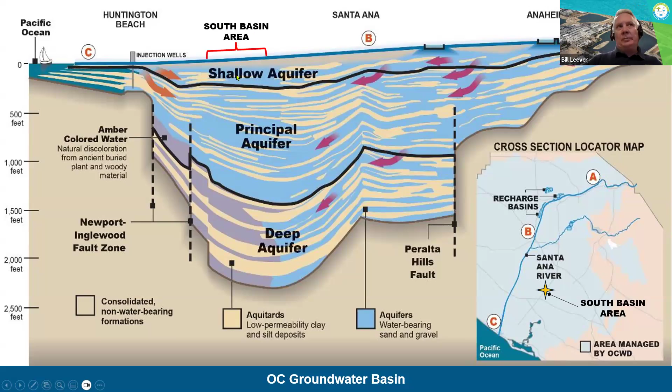Also wanted to point out here along this cross-section location is the South Basin area occurs in the pressure area, the confined area, roughly shown by this bar right here. Okay, focusing in a little more on the South Basin area.

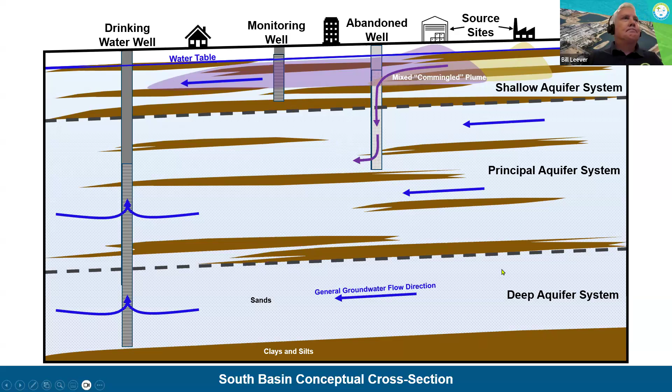IRWD3, back in 1998, started getting concentrations of VOCs showing in some of our test water samples. And IRWD3 is only perforated in the principal and deeper aquifer. So at that point, we knew there was an issue, and we began investigative work.

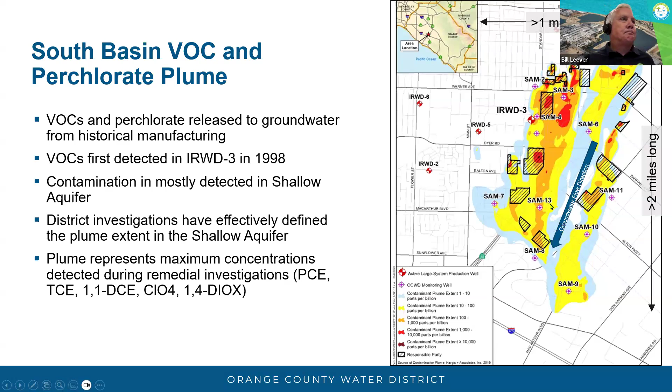So the district is conducting this work under the authorities provided to us under the OCWD Act. And although it's not a Superfund site, we're conducting the work in accordance with the National Contingency Plan and in coordination with the Regional Board and the DTSC.

So a quick chronology of the activities in the South Basin. So as I mentioned before, in 1998, VOCs were detected in IRWD well 3. In 2006, OCWD began active investigations in identifying the source sites, conducting field investigations. In 2015, we issued a preliminary remedial investigation report.

In that report, a number of data gaps were identified. Further investigation occurred through 2018. And then the district, through its consultant, compiled all of the data gathered to date, issued a supplemental remedial investigation report in 2020, and then began our feasibility study of potential remedial alternatives. That was finalized in January of 2023.

And since that time, the district has initiated the preparation of our interim remedial action plan, or in NCP parlance, our proposed plan to remedy the groundwater contamination in OU2, and I'll touch on that in a minute. And then we also concurrently initiated our CEQA analysis of the proposed plan. And then in 2025 on, we'll begin our preliminary design investigations, remedy design, and then construction.

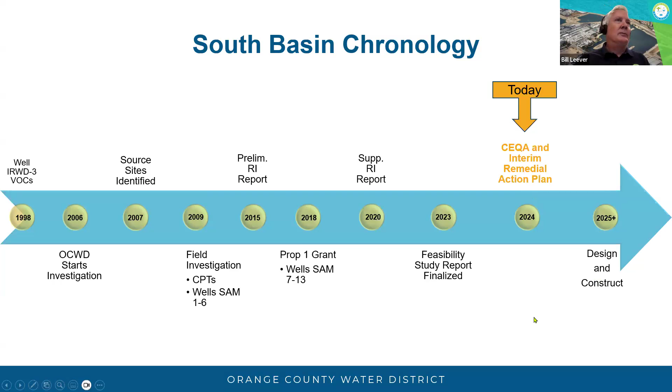So just to touch quickly on the district's efforts in recovering costs for our remedial investigations and work that will be ongoing over the next several decades. We filed suit against over 20 responsible parties in 2008. We've settled with 17 of those parties, and we still have ongoing litigation with 5 other parties.

So what is a feasibility study? A feasibility study establishes our remedial action objectives. What is it we plan to achieve by implementing a remedy? We evaluate various remedial technologies. We refine that list into a smaller list of remedial alternatives, and then we evaluate all of those alternatives against the criteria established in the National Contingency Plan.

So the alternatives that we developed were a no action alternative, which is a requirement of NCP, and it simply is a baseline upon which the cost and effectiveness of the other alternatives are evaluated.

We evaluated monitored natural attenuation, groundwater extraction and treatment with disposal to the sewer and GWRS, groundwater extraction and treatment with re-injection of that water back into the shallow aquifer system. We evaluated in situ chemical oxidation.

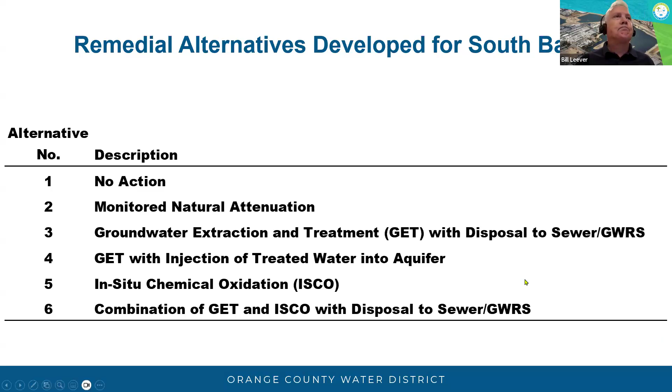That water will then be discharged to the sewer, where it will flow to GWRS and be treated at GWRS, and then ultimately be recharged back into the basin up in those recharge basins up in Anaheim.

Alternative 4 is a similar process in extracting groundwater, but then that groundwater is treated through GAC and reverse osmosis and is re-injected back into the shallow aquifer system nearby each site.

To touch base on the water we are treating, our efforts are focused on what we're calling operable unit 2. Operable unit 2 is the groundwater that is off-site of the source site. So each of the source sites has or is planning to conduct remedial investigations and implement remedies. And Mona and Angela will be talking about those.

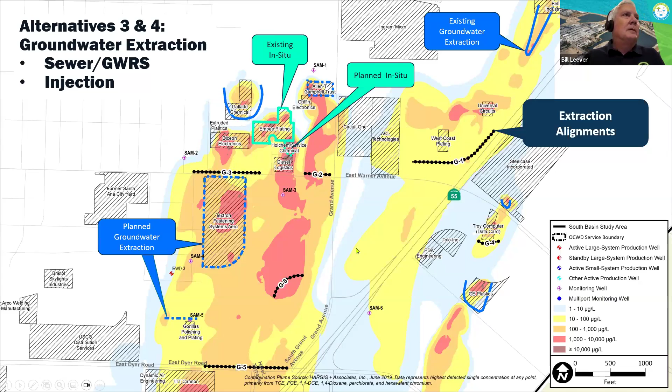And then here in the southern portion of the plume, alternatives 3 and 4, you'll see 2 alignments. And these 2 alignments simply act as catcher's mitts or backstops to, again, prevent the plume from moving any further south of where it currently exists.

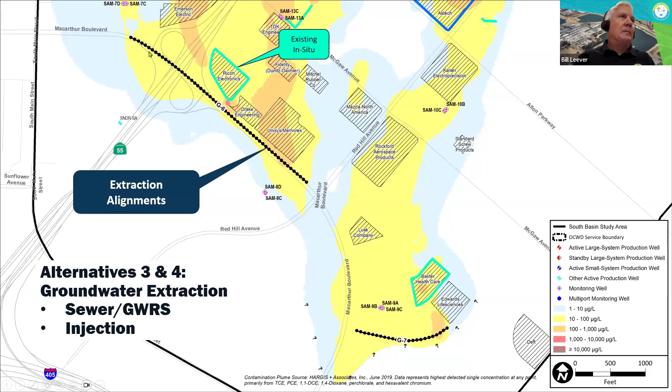So touching base real quickly on the NCP criteria used to evaluate each of these alternatives. The first 2 criteria are called threshold criteria. These criteria are kind of a pass-fail. They either meet the threshold criteria or they don't. If they do not meet the threshold criteria, they're no longer considered a viable alternative for a remedy.

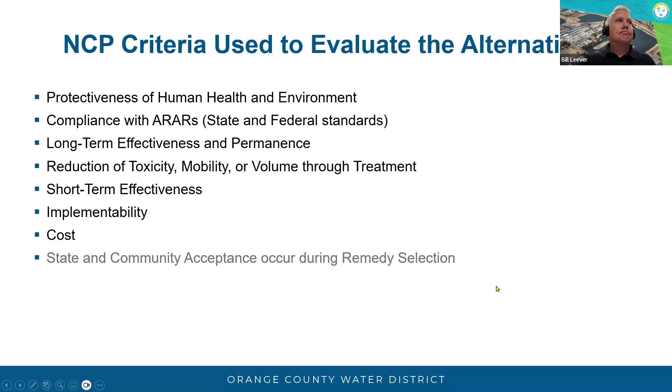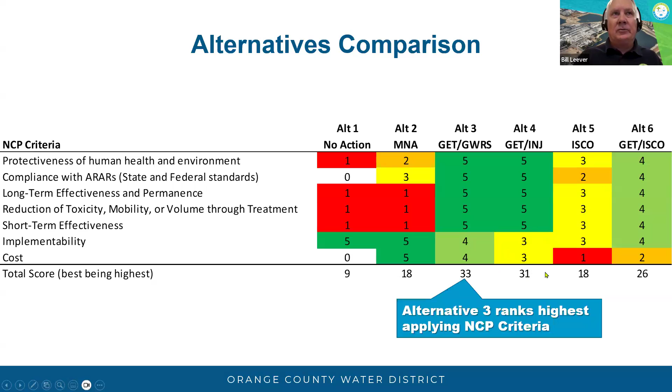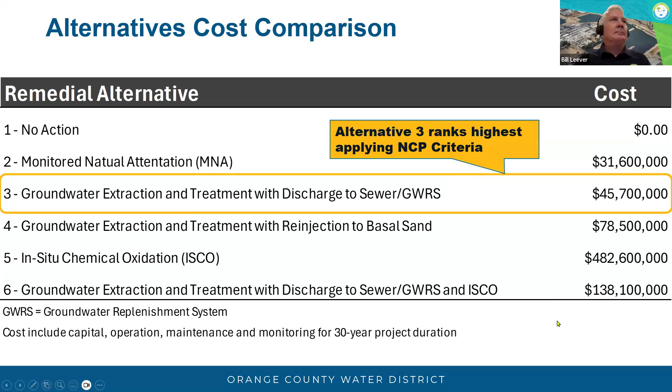So as I mentioned before, our current activities are the preparation of our proposed plan, which would identify the preferred alternative. We're also completing our CEQA analysis by preparing a draft programmatic EIR. Those will be circulated for public review concurrently in the fall of 2024.

Once we have received and addressed all of the public comments after the 45-day public review period, we will address those comments and then present the comments and responses to our board as the lead agency for consideration of approval of the draft programmatic EIR and the draft proposed plan.

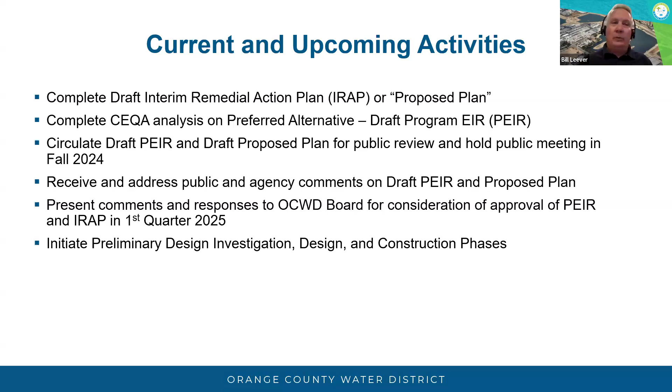At that point, if the board decides to move forward with this project and approves both the proposed plan and the PEIR, we would initiate our preliminary design investigation, which would then also require probably additional environmental analysis, which would be amended to the PEIR, and then we could move into design and construction phases.

And with that, I am going to pass it to Angela Turner for her to present on some of the DTSC's activities in the South Basin. And thank you.

Thanks very much, Bill. I will, oh gosh, I'm not pointed very well there. Okay, thank you for coming and spending a bit of your afternoon with us. Let me get my screen shared. I wanted to share with you a cleanup plan that we have at one of the sites that, okay, I think that is sharing. Can you see my slides?

Yep. Okay, great. Wanted to share a cleanup plan at one of the sites that Bill showed on his map, Embee Plating. We currently have out for public comment an interim measure work plan for in situ thermal remediation. The public comment period started on May 3rd and it'll go until June 3rd. And that cleanup plan is available in its entirety on our EnviroStor website.

So this is where the site is located. Embee Plating is right here. This is a kind of zoom in on the map that Bill shared. The area is north of Warner and west of Grand. Here's the 55 freeway down here. DTSC manages several of these sites. I personally am the project manager for Embee as well as Gallade, former Diceon Electronics, and Textron, also known as Cherry Aerospace.

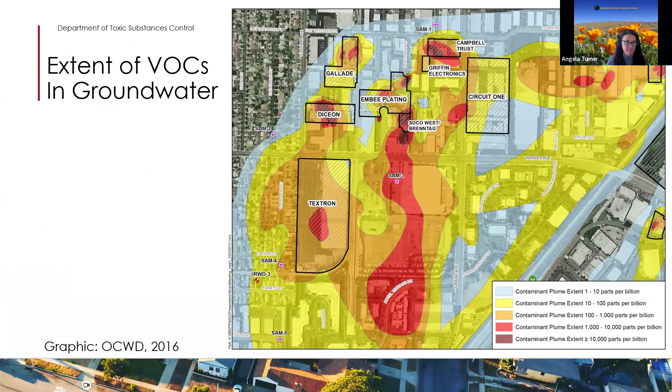So Embee Processing is a metals plating facility, and they mostly work on aerospace projects. They operate 11 buildings here at the site, but most of the releases come from the center of the site. This building and this building are the primary, with minor impacts from this one and this one. So here in the core of their property. And they're surrounded on all sides by other industrial neighbors. They're permitted and inspected by Orange County Healthcare Agency under permit by rule.

Their past uses of PCE and TCE were related to cleaning of the metal pieces before they were coated, either plated or painted. So they have constituents of concern that include PCE, TCE, 1,4-dioxane, hexavalent chromium, and PFAS. The primary risk drivers are the PCE and TCE. So we've been in a corrective action consent agreement with the facility since 2001. And in the intervening years, we've done plenty of investigation as well as installed a couple of existing interim measures.

There is a floor seal in this building over here to mitigate vapor intrusion. And there's also a system of carbon filtration for indoor air and indoor air sampling to verify protectiveness. And then this in situ biodegradation of groundwater is the existing in situ measure that Bill referenced on his slide. It's an injection of emulsified vegetable oil along with nutrients and microbes. And the proposed interim measure is the electrical resistive heating that's out for public comment currently.

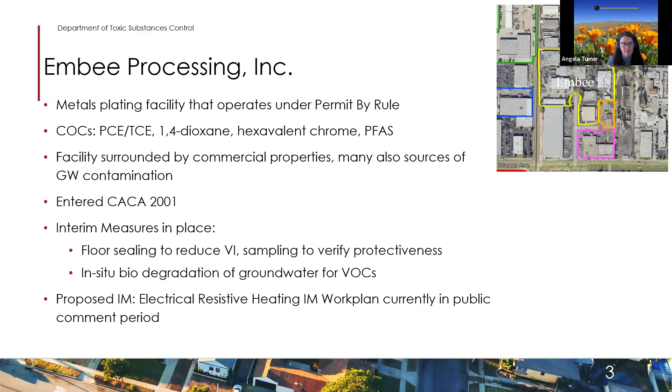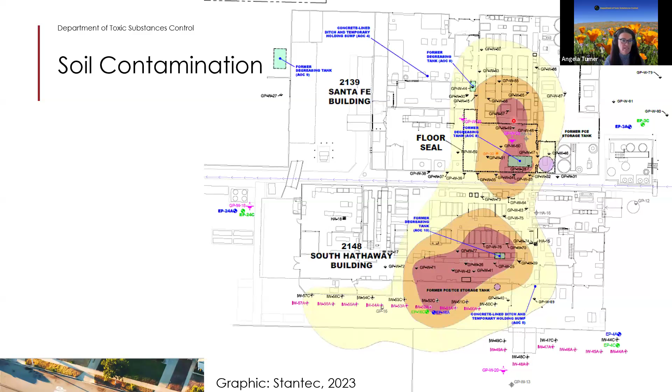So a bit about how in situ thermal remediation works. There will be power that gets brought in from the regular utility that's going to need to get upgraded by SoCal Edison because this equipment is really power hungry. That'll go to the equipment enclosure and then run out to the wells where these electrodes are installed into the soil in casings that also contain a vapor recovery component.

So they will introduce electricity into the subsurface. And because the soil and water are such poor conductors of electricity, they will heat up. This red area represents the treatment zone that will experience those elevated temperatures. The groundwater will get heated to a level above the boiling point of the VOCs, and they will partition out of solution as steam and get recovered as this green cloudy representation, recovered by the vapor recovery system.

And so that will go in these green lines over to a treatment center system. It'll get cooled and the condensate will go through GAC to the sewer. And then the dried air will go through carbon as well to the atmosphere. Those activities will get permitted by OC Sanitation and South Coast Air Quality Management District, respectively.

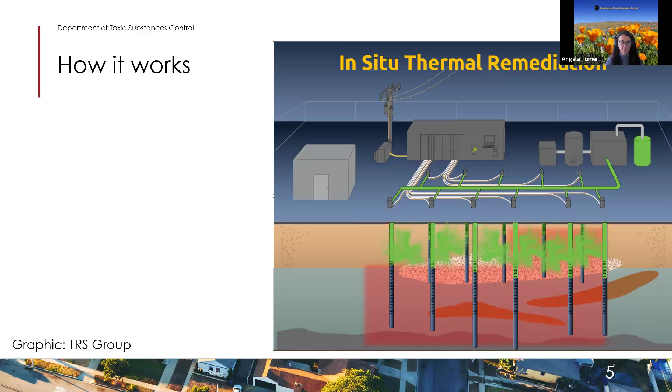So this is the plan for how these components are going to be laid out at the MB site. The red circles are where electrodes will be installed vertically, and the lines represent an overhead view of borings that'll be installed at an angle, because a lot of the mass exists under these buildings that have very large bolted down equipment, integrated with the building process lines. And this is still an operating facility, so getting in there with all of this equipment just wasn't possible.

The blue circles are locations where workers will be able to go in and install probes with hand auger equipment. The green are temperature and pressure measurement locations. There will be 67 electrode wells spaced about 14 to 16 feet apart.

So they're installed, these ones will be installed in a row. The drill rig will line up with the front bumper pointed to the south, the mast to the north, and it'll be angled from 6 degrees to 29 degrees off of vertical to install these wells. And then there's going to be a treatment compound over here in the bottom left.

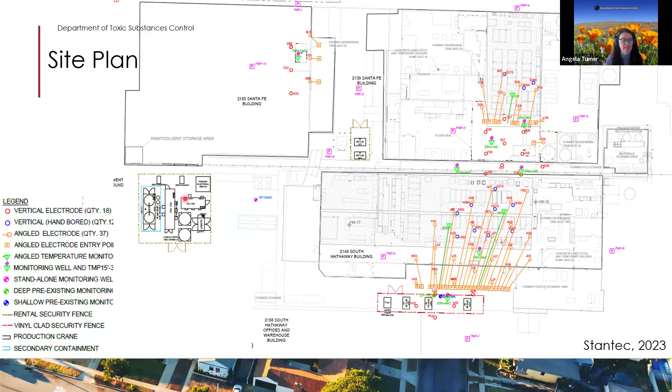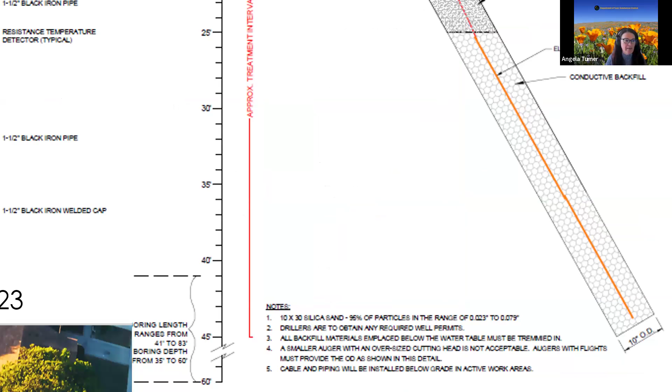So this is how the electrodes and the monitoring points are built. I think this might be a bit hard to see, so I'm going to zoom in. I'll start from the bottom up. There is a lower electrode that's installed in conductive backfill that's carbon-based, and the total depth is between 35 and 60 feet for these. So that will treat the deeper zone.

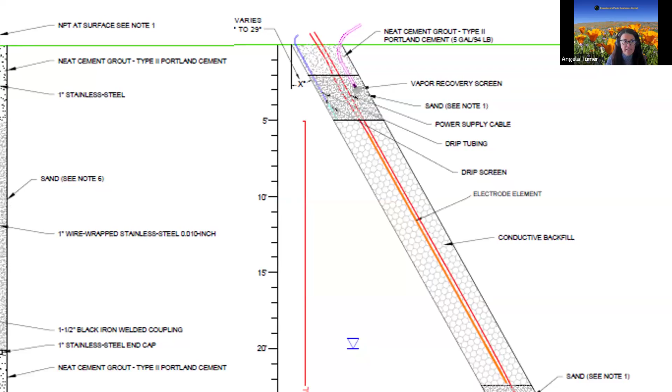And then there's a sand isolator. Here's the water table at 20 feet, then a shallower electrode. So the vadose zone as well as the saturated zone will get treated. And then up here is the vapor recovery screen. There's also a drip tube to introduce fresh water into the well, because as the vapor gets extracted that can be drying, and the electricity will spread out better if the soil retains its moisture. So the water will get fed in there on an as-needed basis.

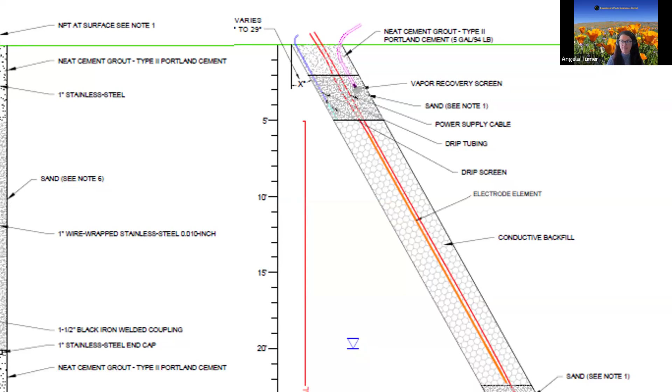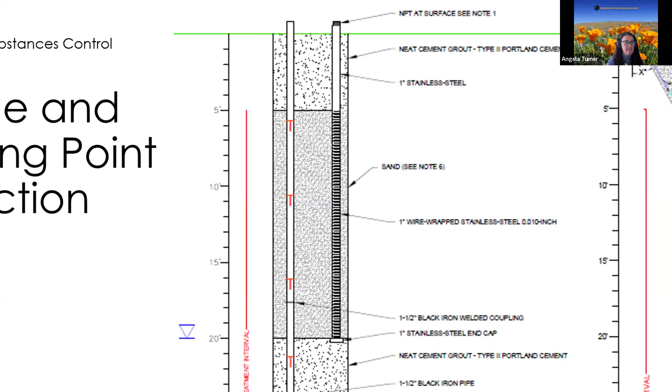So over here we have a temperature and pressure location, a casing that will just have temperature and pressure sensors. And then, let me zoom out a little so you can see that, this is a soil vapor monitoring location where we'll be able to sample to both monitor for the success of the cleanup as well as protectiveness of the occupants, because folks will still be in the buildings above. We want to make sure that the existing vapor intrusion risk that we've assessed doesn't become elevated as a result of our activities.

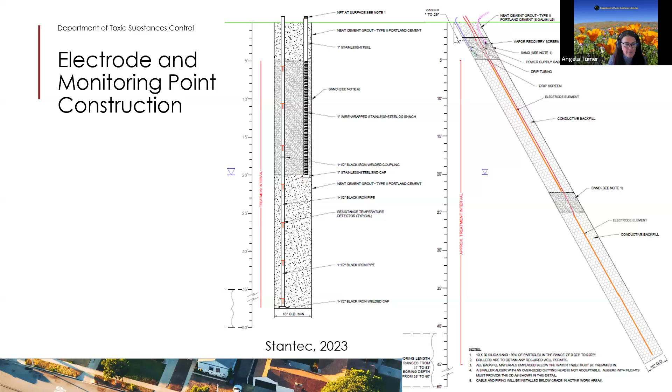So this is a, let's see, how do I make this video go? Maybe if I turn off the pointer and go back to the cursor. I didn't practice this one in presenter mode, I'm sorry.

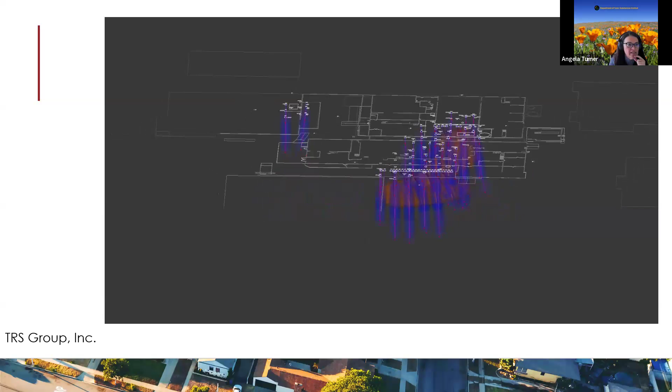Oh, there we go. So this is a 3D mock-up of the plume mass, and the blue lines are the thermal treatment wells that will intersect it. The idea was to, based on various depths and angles, get coverage of the entire area that needs to get treated and get the heat distributed through those areas, even underneath the building. Maybe I'll let that go through one more time just because it's kind of cool.

Okay, enough of that. So we'll do a lot of sampling before, during, and after the project to guide operational decisions and evaluate how effective the cleanup has been, and as I mentioned, to ensure protectiveness of human health. We'll be sampling indoor air quarterly to make sure that it's within commercial screening levels. We also have a perimeter of soil vapor wells to sample every month to monitor for any kind of lateral spread to buildings that are not currently at VI risk, to make sure they stay that way.

Subsurface temperatures will be measured daily, and pressures will be measured weekly. We're going to want to really keep close tabs on the pressures there and make sure that they are negative below the pressure of the air inside the building, so that we have transport headed from the occupant spaces into the subsurface as opposed to the other way around, so we don't induce any more vapor intrusion risk.

The waste treatment streams will include the air treatment system and the water treatment system. Those are both sampled according to the permit conditions from SCAQMD and OC Sanitation. The inlet concentrations will be measured closely because that will give us the tools, when compared with flow rates, to evaluate the total mass that we've recovered.

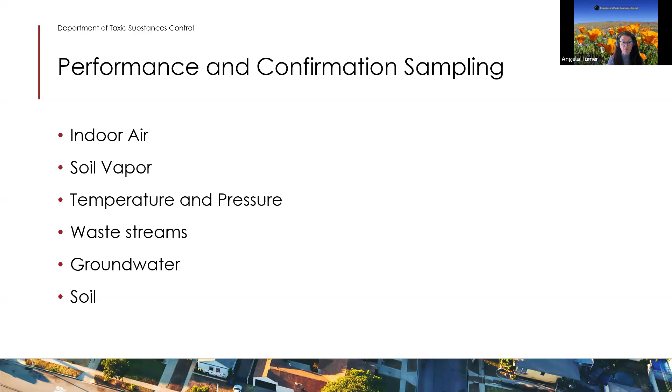We anticipate the system will run for about 6 to 8 months, and we're looking for an order of magnitude reduction in VOCs in both soil and groundwater, which is really exciting.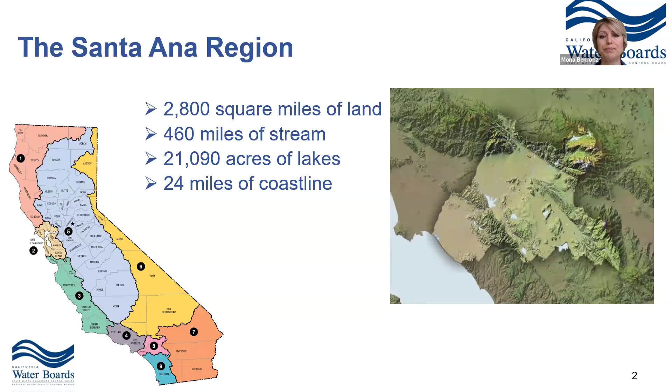To provide an overview of historical operation at this particular site, it was historically used to clean and recycle PTFE, polytetrafluoroethylene, using acid treatment. The reactor involved in this operation contained 70% perchloric acid with 30% nitric acid at elevated temperature, 300 degrees C, so you can imagine how oxidizing this solution can be. The PTFE pellets, after the cleaning and treatment using the acid bath, were neutralized and washed and placed in bins across the site for draining and drying.

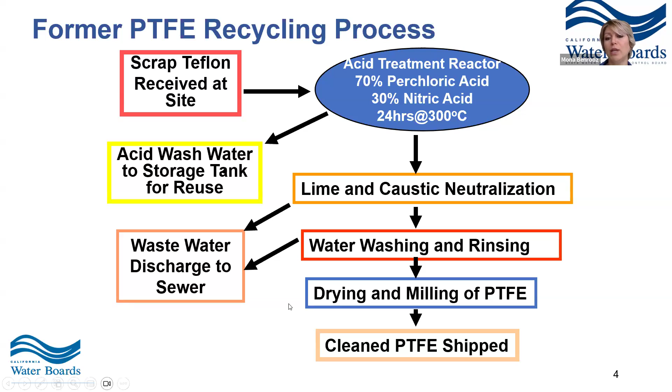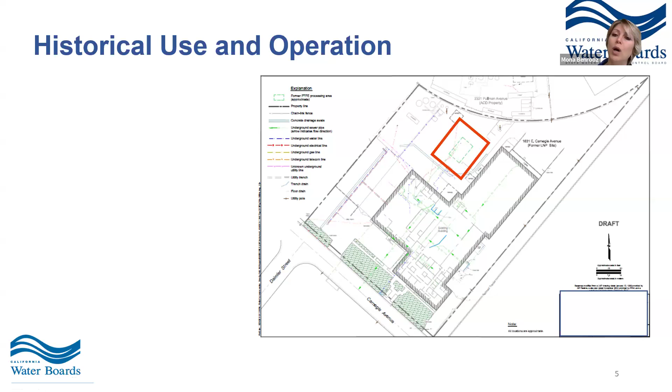Before we get to the result of the investigation and the effect of this corrosive and very reactive water on the subsurface, let me just provide you with a little overview of the hydrogeologic setting in the general vicinity of the site. So, two water-bearing zones; these are the shallow water-bearing zones that were represented in the cross-section shown in Bill's presentation. The first water-bearing zone is a dominantly fine-grained formation, dominantly clay, to a depth of about 34 feet below ground surface, depending on the location.

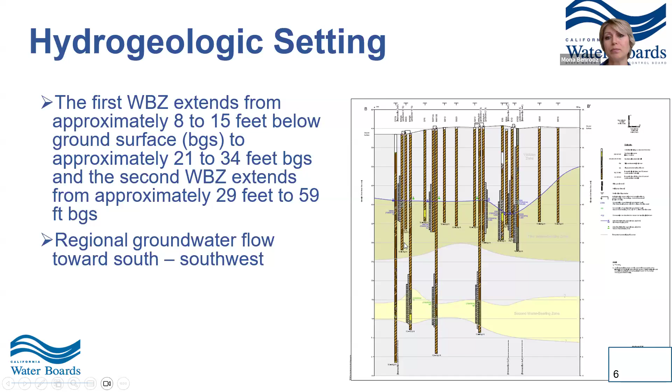The second water-bearing zone is coarser-grained, sandy sediments, and the general groundwater flow direction is towards the south-southwest. So now let's see the effect of those historical activities on the soil media. This is the isoconcentration contour map at the site in the soil media. The responsible party at this site conducted soil investigation every 3 feet, so very close vertical and lateral delineation.

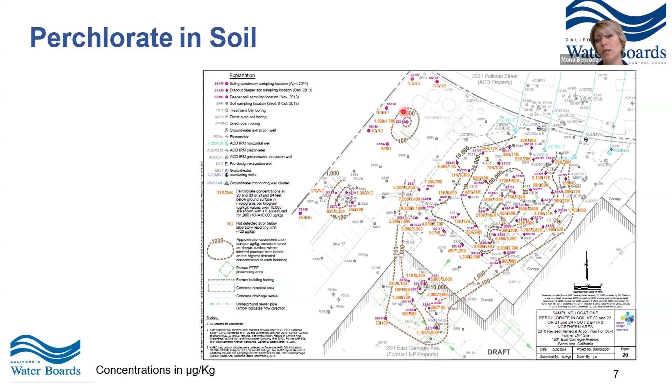The highest concentrations were detected, as you can guess, around the former PTFE processing area, with concentrations exceeding 100,000 micrograms per kilogram. Based on the properties of perchlorate, you can assume what impact it could make on the groundwater underneath this area. We will look at that later. And you can see that the extent of perchlorate in soil also covers the areas underneath the building. The reason is that there is a secondary source from a leaky sewer pipe underneath the building as well. So you also see elevated concentrations in different areas of the site.

How about impact to the groundwater? These maps represent the current isoconcentration contour maps within the first and second water-bearing zones on site. I should note that in the earlier years of this project, back in 2003, I believe, a pump and treat system was installed, primarily for the purpose of containing the plume, preventing further migration of the plume off-site and further degradation of the water quality down gradient of the site.

So in the current situation, the highest concentrations are still in the range exceeding 1,000 micrograms per liter around the PTFE processing area. It's interesting to note that even though significant mass was discharged on site around the PTFE processing area, because of the type of formation, the second water-bearing zone, back in those years and also currently, is non-detect. And this is important when we discuss other aspects of the project.

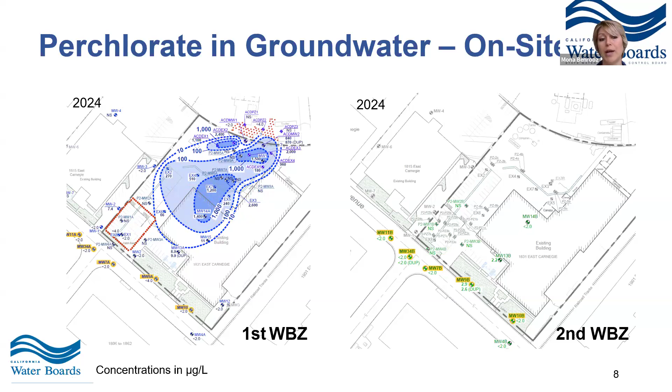So how about the impact to the water-bearing zones off site? Just to orient you, this is the footprint of the site, and the map on the left represents the off-site portion of the plume within the first water-bearing zone. As you can see here, the operation of the pump and treat system for almost 20 years now has resulted in detachment of the on-site and off-site groundwater plume.

But a point that I would like to highlight is that, as you noted, the on-site area within the second water-bearing zone was non-detect. However, when we stepped out of the site, the first water-bearing zone plume has found its way, and it has dove in and migrated within the second water-bearing zone, which is even more transmissive.

So that highlights the importance of vertical delineation, and that's why we emphasize it. Even though the on-site second water-bearing zone was non-detect, the groundwater plume has found its way to move into the second water-bearing zone and degrade water quality.

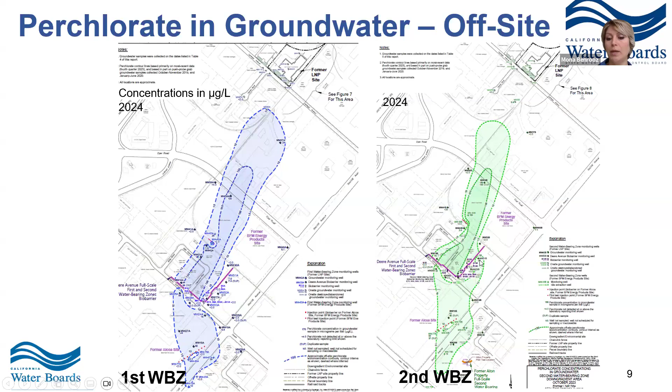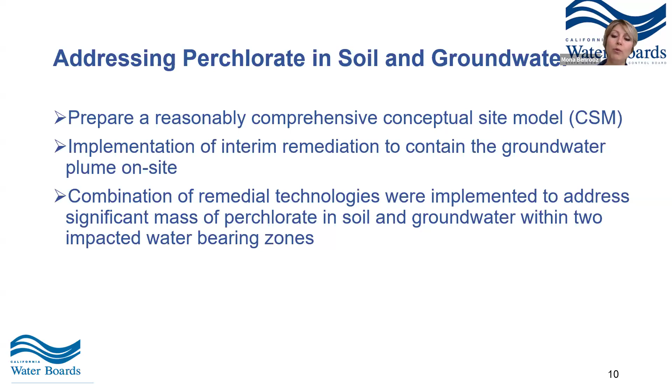Now, let's look at the actions that we have taken over time. All the sites under our oversight are putting together conceptual site models. This example site is one of the sites that has practiced one of the more comprehensive conceptual site models. As mentioned earlier, stages of the project included installation of an interim remedy to contain the plume on site. In addition, a combination of remedial technologies was implemented to address significant mass in soil and groundwater. We will take a look at some of those actions.

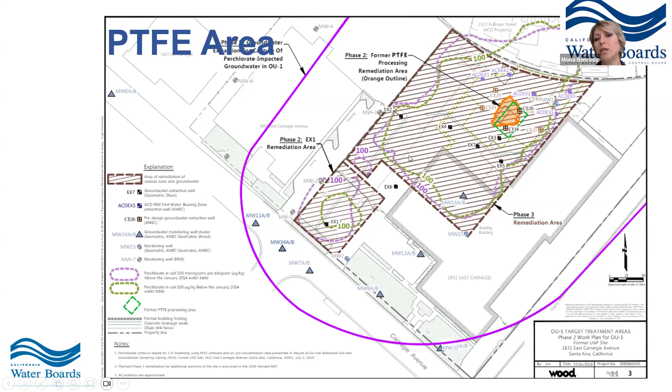Remember that we talked about the PTFE processing area. One of the actions was to excavate the soil impact exceeding concentrations of 100 micrograms per kilogram within the vadose zone around the PTFE area, using large diameter augers with different diameters. The larger diameter, 5-foot augers were filled with mulch to also promote additional remediation through biodegradation of perchlorate.

What else? Earlier, I showed the impact of the operation of the pump and treat system on the plume, but the map on the left shows the first water-bearing zone groundwater plume back in 2004. So you can see how elevated the concentrations were.

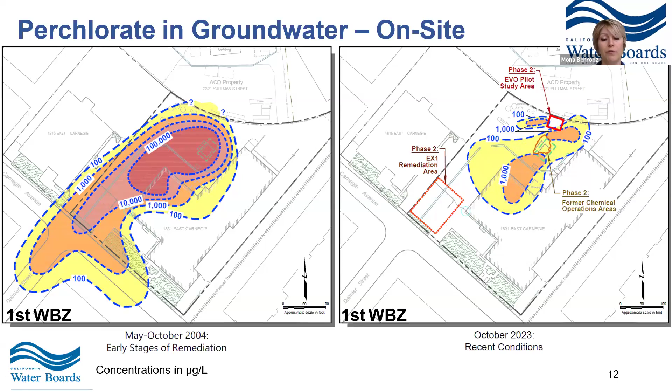The highest magnitude of perchlorate is still around the PTFE area. Other areas show different pilot scale studies that have been done, and unfortunately, we don't have enough time to talk about those. How about the offsite plume? For the offsite plume, we started incorporating bioremediation. It started with a pilot scale study that was implemented back in 2016. Upon receiving promising results, the permeable reactive zone was extended to capture the entire width of the plume.

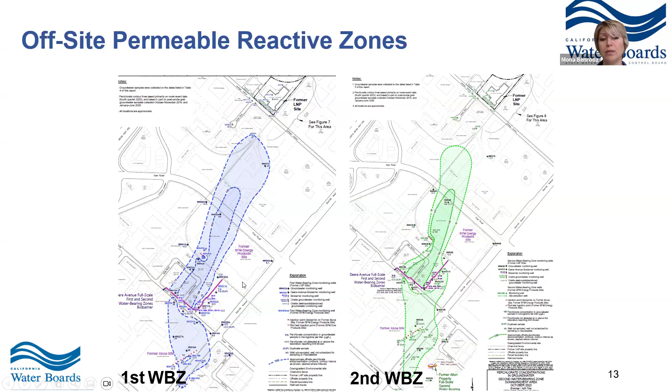So this permeable reactive zone is the largest remedial effort conducted in our region, including 232 injection points within 2 water-bearing zones. And as the groundwater passes through this barrier, basically the levels go to non-detect. So the groundwater gets remediated very effectively. To emphasize the effort that has been done for bioremediation of perchlorate using permeable reactive zones off-site, this map shows again the alignment of the full-scale barrier. Additional barriers are planned more upgradient of this existing barrier.

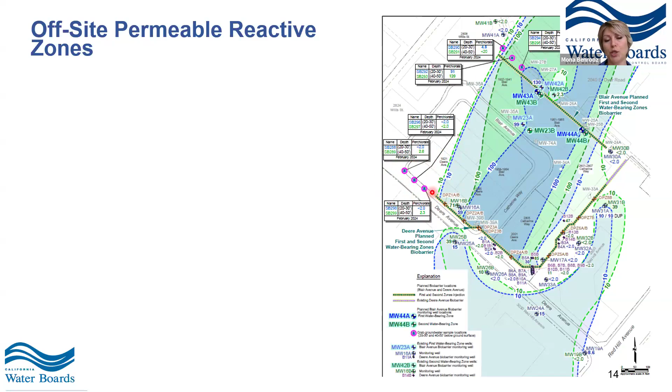So this new barrier basically intercepts the plume in different areas. That long plume is planned to be targeted in different areas so we can break it down and reduce the concentration. There's an important point here I wanted to highlight. As we continue to replenish this full-scale biobarrier, we are also mindful about evaluating the dynamics of the plume, taking groundwater samples, and ensuring that the barrier is intercepting the full width of the groundwater plume. Another depiction of the full-scale biobarrier here.

As a summary, this project is a great example of successful collaboration with the responsible party, putting together a reasonably comprehensive conceptual site model and implementing a combination of remedies to address the perchlorate impact within the footprint of the site and also in downgradient areas.